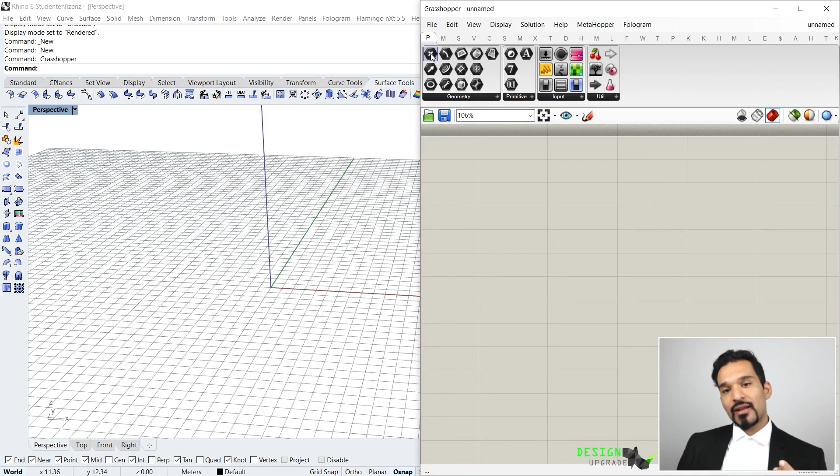Okay, very good. So the next thing I want to show you are some basic concepts of components. Every component, for instance, that looks like this, that has a black hexagon with some kind of symbol, is a container. That means it just contains information. It does not really calculate too much, so you won't get a point or anything out of this. You can just supply information there, like my construct point, and it will just contain that information.

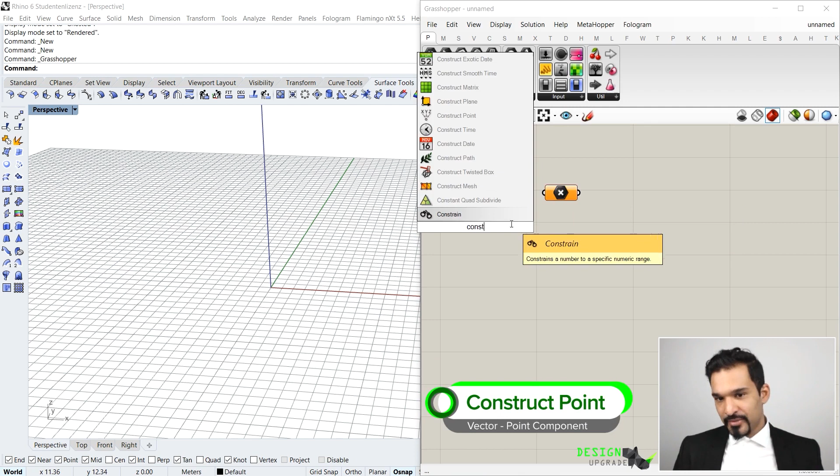So construct a point. If I just put that, it's now the same kind of thing. It just contains that point.

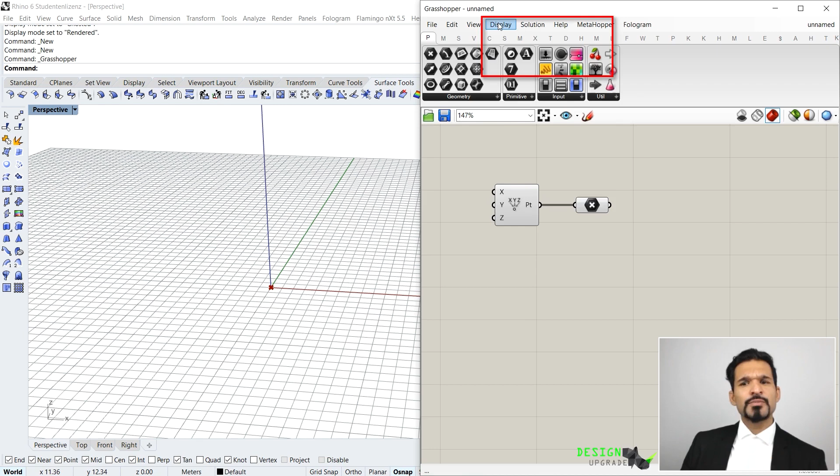Now, very important before I continue on. I currently have a different display than you might have. I currently have a display that shows me the icons. If you want to change that, you go to Display here and say Draw Icons.

And if you say Draw Icons, it will now show you the shortcut of that component. And if you go to Draw Icons again, it will change into the icons of those components. So Display, Draw Icons, and you can see it will give you the shortcut of those. Okay, it's a point.

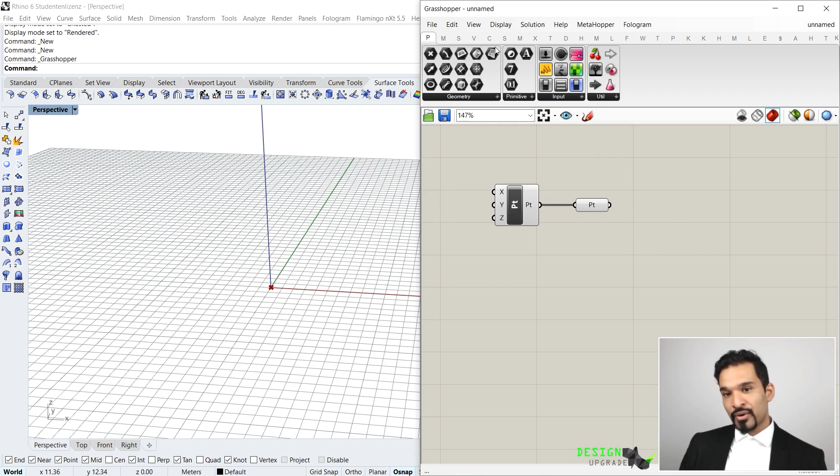You could also go to Draw Full Names. Then these components will get much larger, and it will actually have all the information there for you. Now, in the beginning, this might actually be the right approach because you really get a clear definition of what inputs and outputs you get and what's the current name of the component.

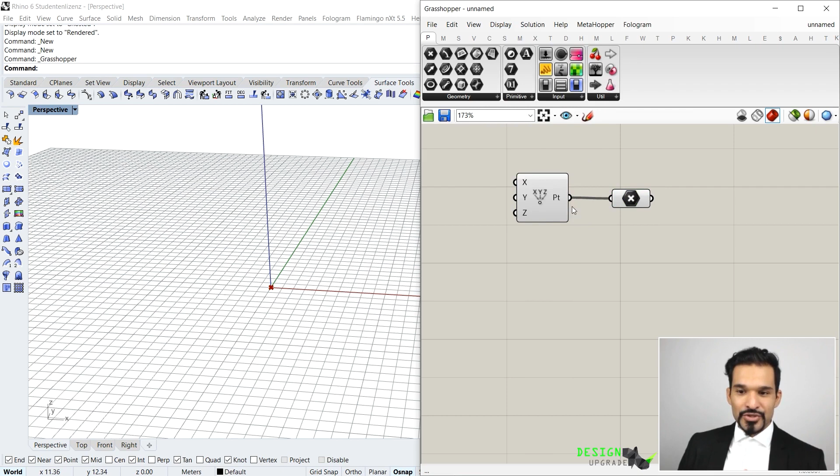I have built up my course, though, using the Draw Icons method, and not the Draw Full method. I'm using always the shortcuts because that makes your whole script that much nicer and neater. But if you want, you could also say Draw Full Names for now, but keep the icons.

So you always know what kind of component I'm using, although you will have different inputs and outputs just by the length, because the name is actually written here. So let's just keep it for now and continue on.

Now, the next thing I want to show you is the kind of display of your components. So keep in mind that these are always just containers, and those containers contain information, as we said.

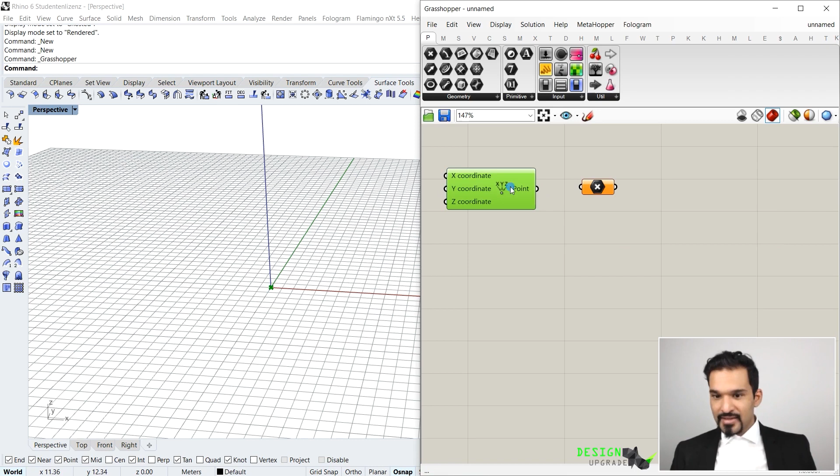Now, there are different ways that a component will actually appear. Currently, this is turning green, and this is just fine. This is just a light gray, which means this component is running and has no problems at all.

This is due to that a lot of components will actually come with default values. That means that as a default, they will contain a value that makes a script or the component run already. Like the construct point will come with XYZ coordinates set to 0. So that means this thing will always run. You do not need to do anything to make it run initially. You can change it obviously, but you would need to do something.

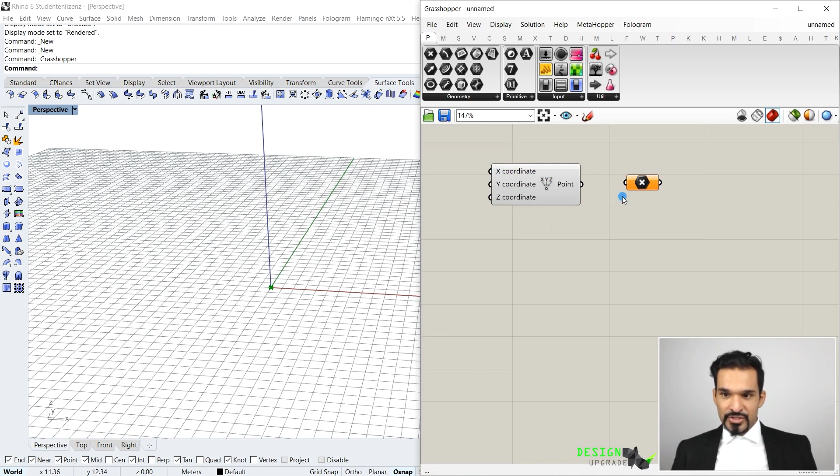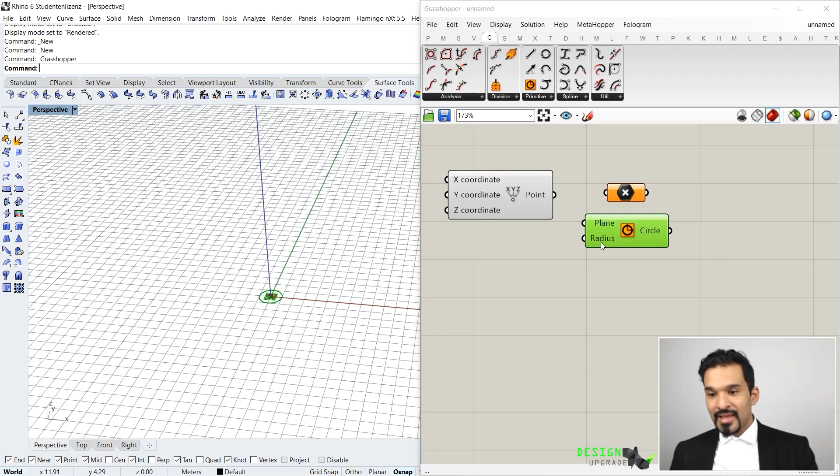So I go to Curve, go to Primitive, and go to my Circle here. And if I bring this guy in, you can see that this one also works, because as a default, it will have a basic plane, which is my world XY, and it will have a radius set to 1.

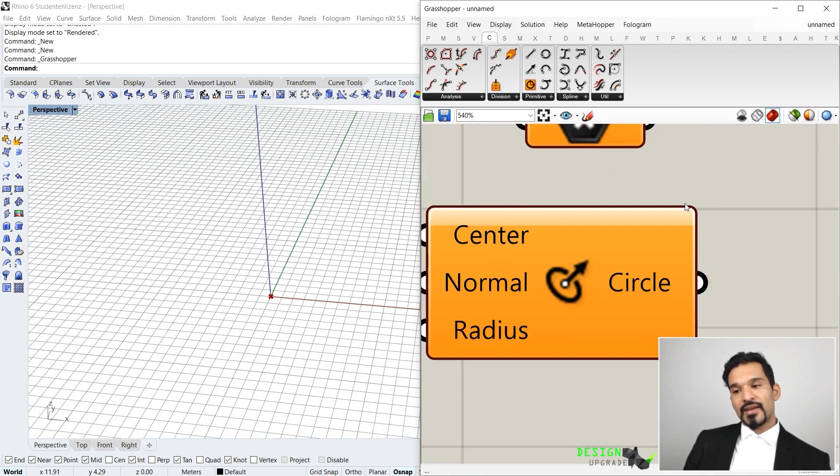So let me look at something that might not work from the get-go. Maybe I want to take a circle, but taking a circle as CNR. So if I take a Circle CNR, what it needs is a center, a normal direction - so the normal to its plane of the circle - and a radius. So just one more input than the normal circle. But something interesting is happening: it's not showing me any information.

And if you do not see a balloon here, which might appear, you would want to go to Display, go to Canvas Widgets, and say Message Balloon, please trigger it on. This is very important because this is actually a way for you to understand what is currently going wrong with your component.

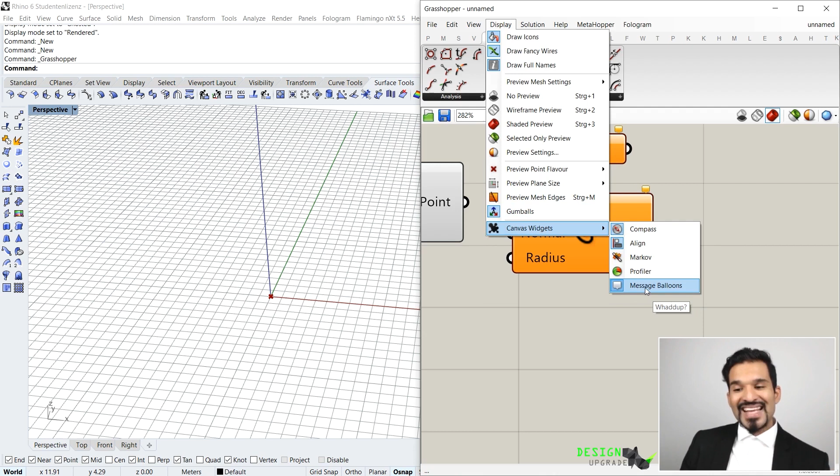Again, go to Display, Canvas Widgets, and press on Message Balloon. And since you're here, I also want you to enable the Profiler, because that will help you later understand which of your components takes the longest to compute. But that's something we'll talk about later.

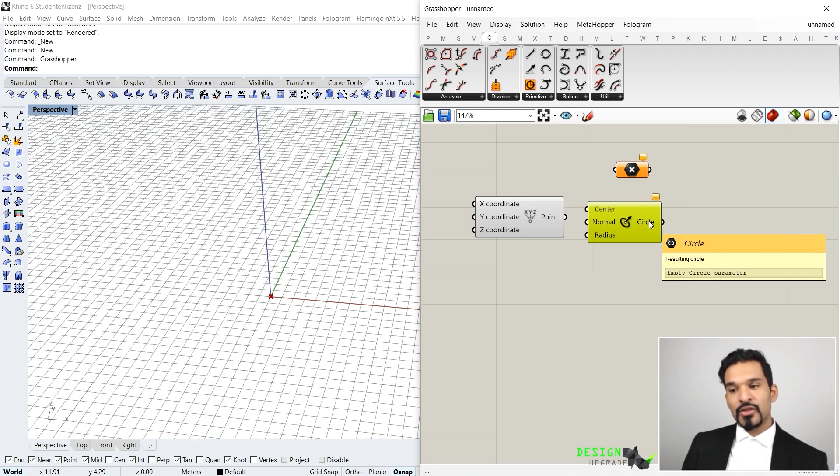Now if I have the balloon open and click on it, you can see it's telling you something failed to collect data, so it cannot give you any solution. If you go to the output, it will tell you it's an empty circle parameter. It cannot give you anything because something is missing.

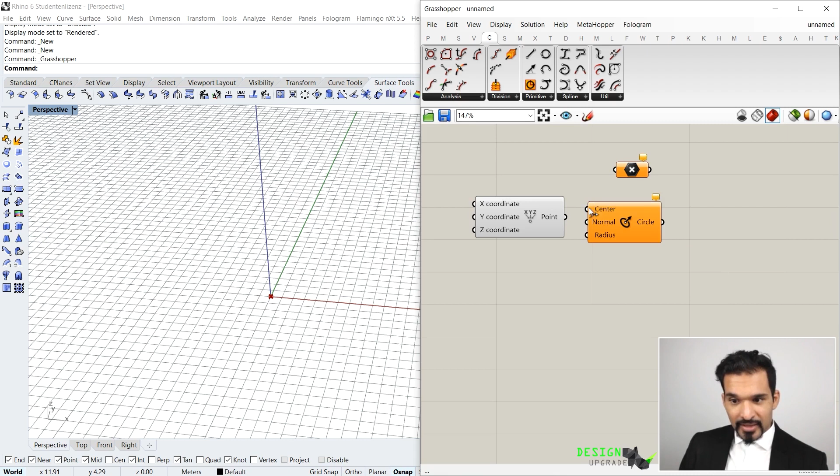It's very useful to look here and see what's actually missing, because maybe you don't need to supply all the information, since the normal and the radius already have a default value. If I click on this, it tells me I just need to supply the center. If I supply the center like so, this will run now.

You can see this is running, the balloon is gone, and I can work with this now. The profiler will show you, for your whole script, which component will take the longest to compute.

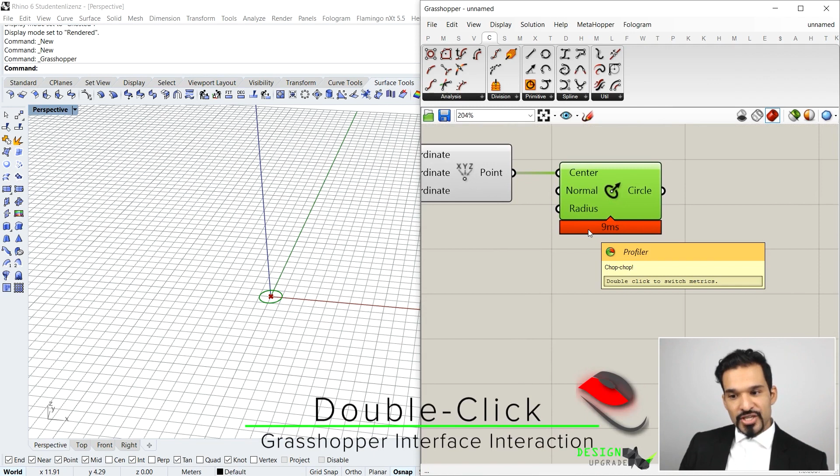You can take this and keep it. If you double click it, you can change it to show how long it's computing or what percentage overall this is taking for the whole script. So if you have a large script, you might see a component taking 90% of your computation time, and you might want to change something there so it runs faster.

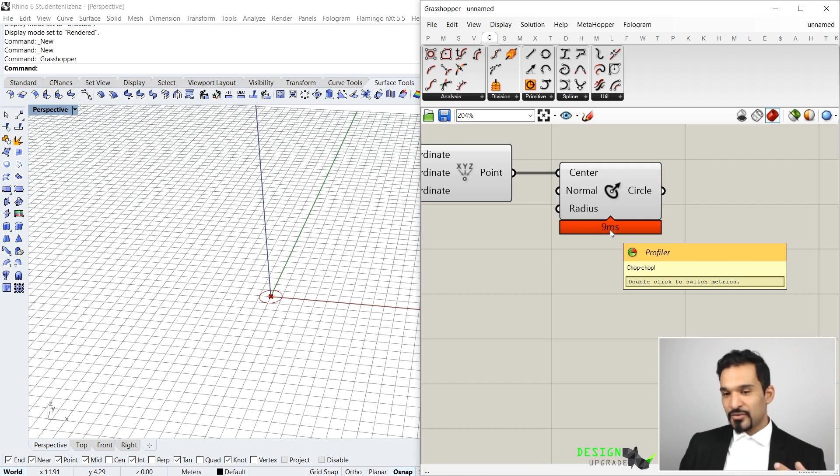Sometimes if your script takes minutes to compute, which might happen, you can see which component is causing that problem just by double clicking here. Okay, that's the profiler, and that's the message balloon.

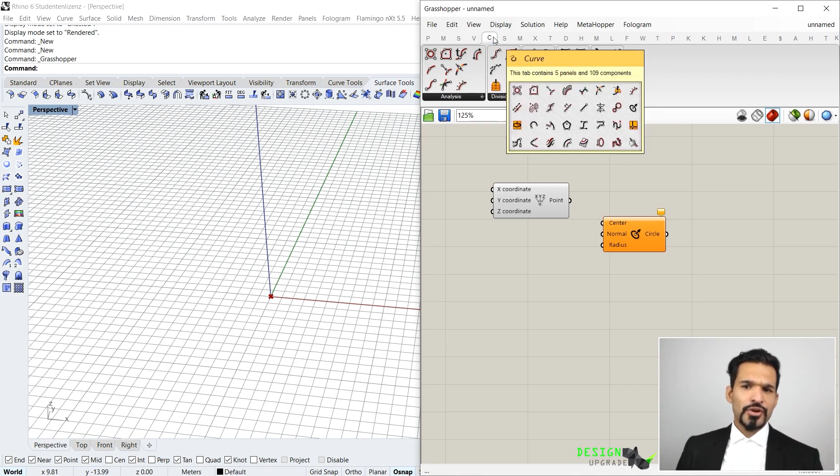So we've just learned how we can see the first two kinds of colorings in Grasshopper. Now there's one more, which is actually red. To show red, go to, this time not Curves but Surface, and take a primitive there — can be anything. Let's just take the sphere.

If I hook up the sphere now to my center, you can see that something will be red. This is the third way your component can look in a basic sense when it's running. If you go to the balloon, it's saying data conversion failed from surface to point. So it's a conflict right now in the type of information you've supplied to the circle.

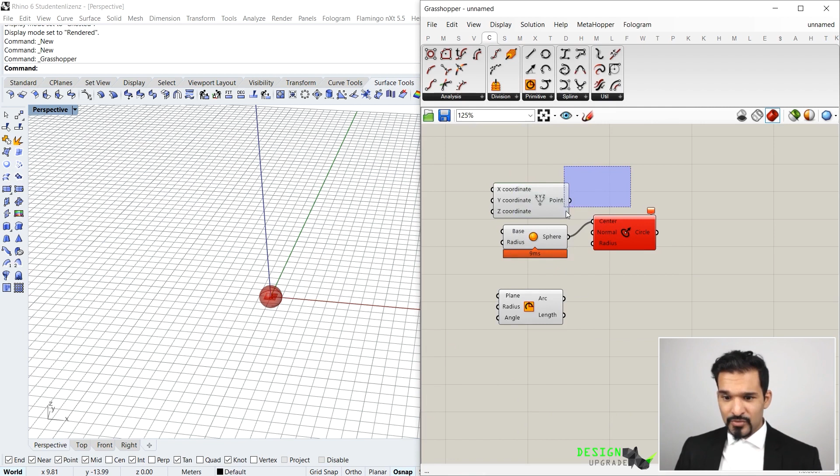It's looking at a plane or a point, but it can also sometimes work with curves. For instance, if I go to Curve and Primitive again, I could take an arc. So to show you the arc, I just clicked on this button here, which only draws the preview geometry currently selected. This is selected, that's why it's green — that's actually the fourth way a component looks.

If I press on this, only this thing will show. If I deselect that, everything is shown. So if I put my arc into the center, it can actually convert the arc's center and use it as information for my circle — also something very useful to know.

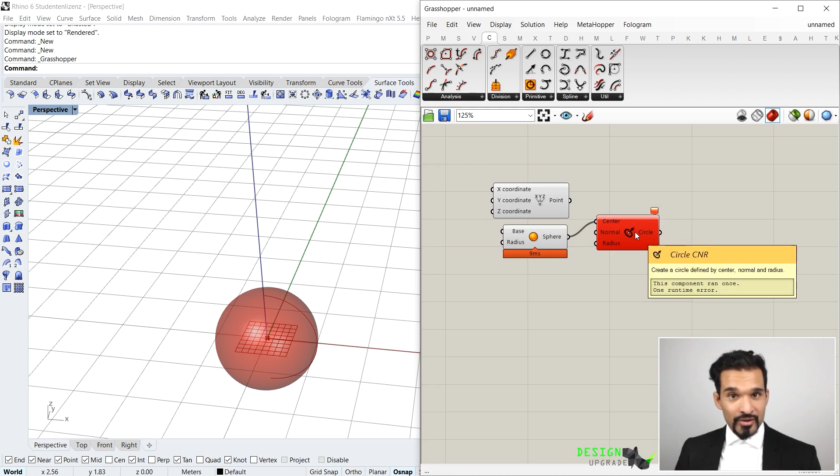But if I supply a totally different format of information, like a surface — in this case even a solid kind of thing — it will say I cannot convert a surface to a point, and this component is not running. Red always indicates a critical error. You really need to do something, because in 90% of cases your script will not continue working, so the output will give you nothing.

So these are the four basic types of how your components look in their normal way. The first one means everything is fine, and if you select it, it's always green. The orange one means something is missing or slightly off, and red means a critical error, something is totally off.

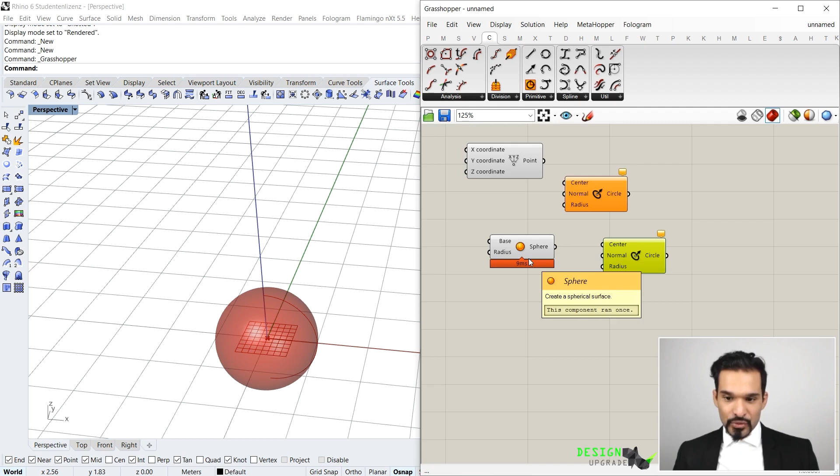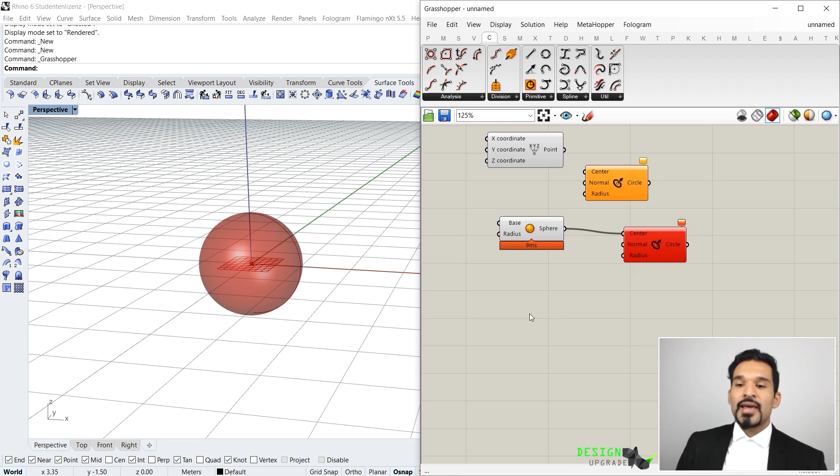Now that we've looked at that, I want to show you the different display modes of my components. This is usually the normal way I see my information. I'll take this one, for instance, since it's the most prominent. The sphere currently is showing me, and when it's light gray, you can see the information in Rhino. If you click on it with your mouse roller, you get a pop-up menu.

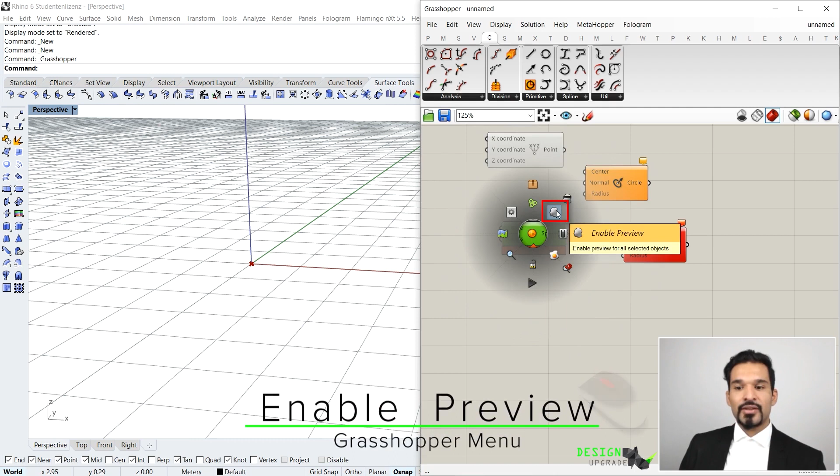If you hit 'disable preview' from that menu, the component turns into a darker gray, meaning it is still running, but the visual output is not available. You do not see the output in your Rhino canvas, but it's still there—you've just hidden it. Click the mouse roller again and select 'enable preview' to bring it back.

This is the first instance of a preview state for your component. It just means you cannot see it—it has nothing to do with the three different running states of the component itself. It's purely a visibility factor.

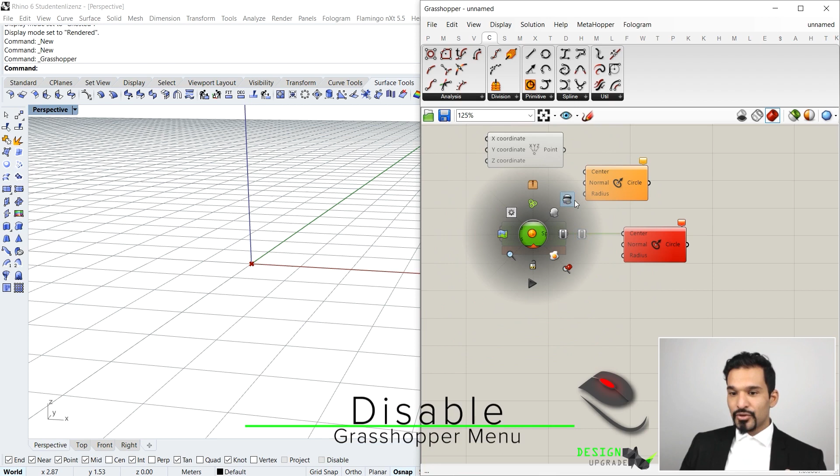Now, another option affects not just visibility but also the computation of the script. If you press the mouse roller and go to enable and disable, disabling a component means you've locked it. It will not run—you can do this with any component, and it won't take input or give output. It's simply not running right now.

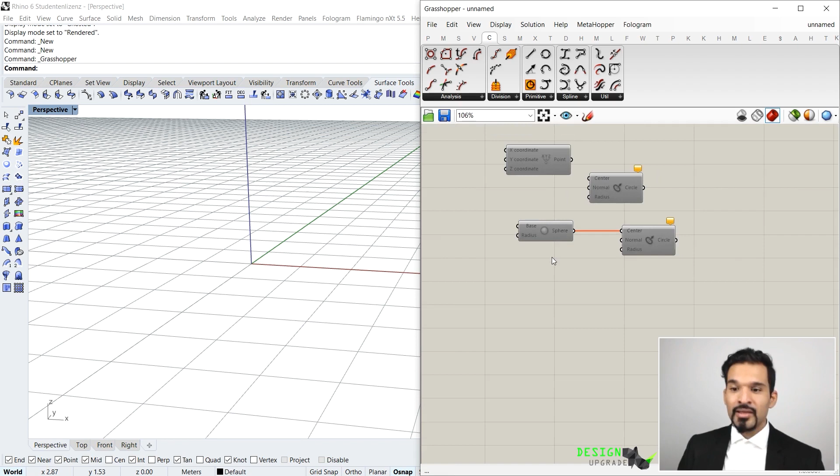This is very useful if you have a large script and don't need a certain portion of it to run in order to adjust or modify another part. You can select that portion, disable it, and your whole script will run much faster since it doesn't need to recompute that portion.

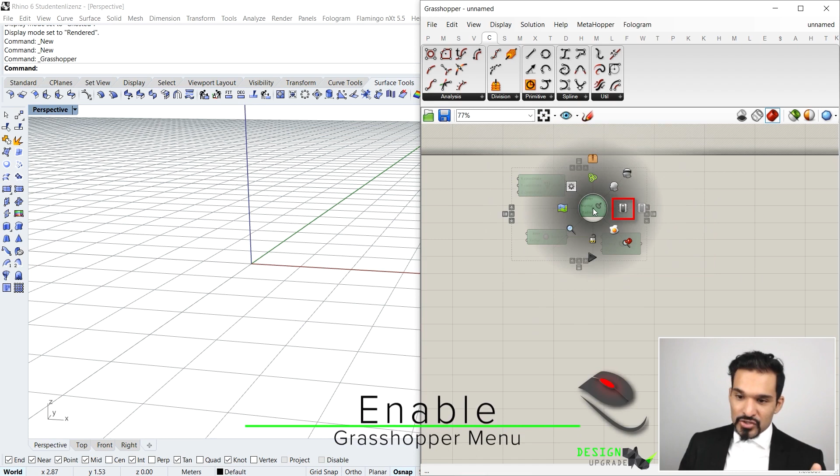To bring it back, select everything, use the mouse roller, and hit enable. So you have two—actually three—different ways of displaying a component. The normal one is light gray, and if it works, you see it.

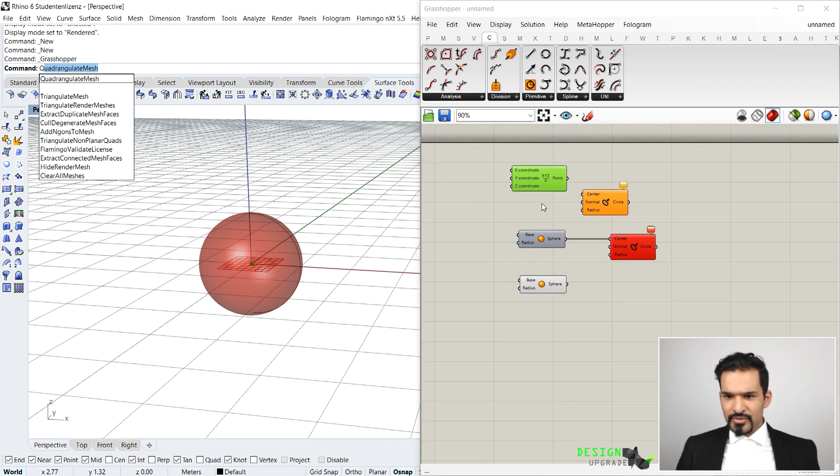With the sphere, I'll make a copy to show these different options. This is the normal one. I'll make another copy, and another. The next condition is disabling the preview, so you don't see it. The other condition is disabling the component itself. This is how they'll look in a color scheme: light gray, dark gray, and a very dark faded gray.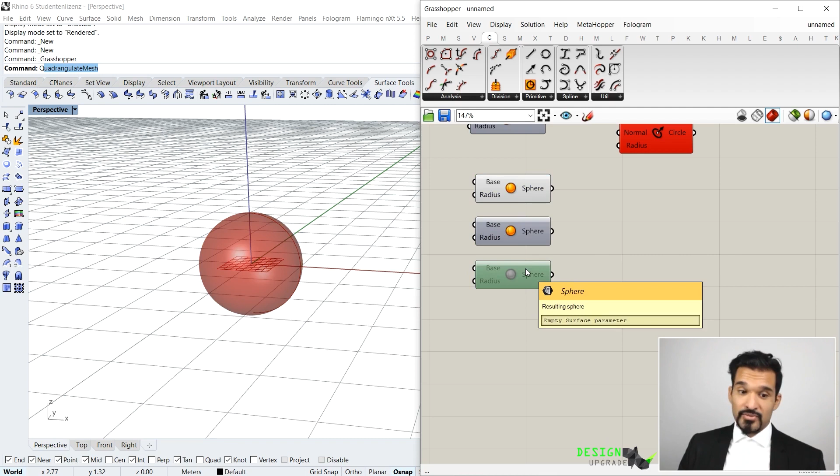This means the preview is off, this means you see everything, and this means nothing is running—this component is dead currently, it's locked.

The last thing I want to show you is the wires, and then we're set on the basics and can actually start with the real course. Good job—see you in the last one, and then let's get going.